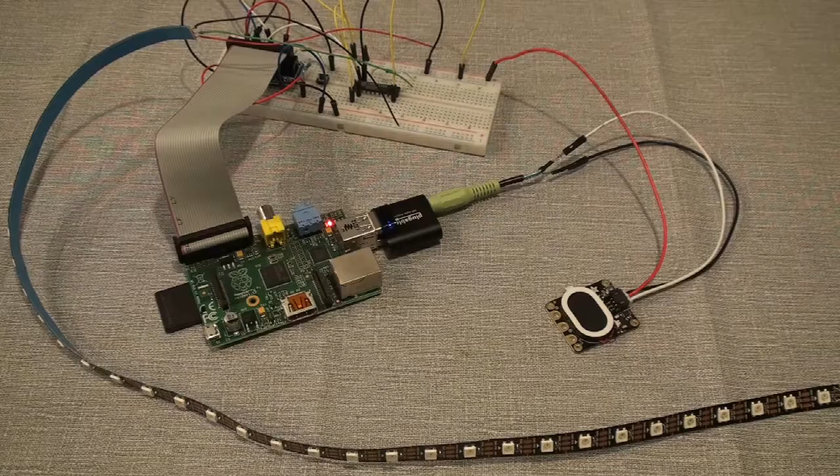Even better, it was such a simple, quick solution that I still had plenty of time to clean up those counters while it printed, which was really good because my wife was not nearly as impressed with my hook problem-solving skills as I dreamed she would be. Let's get into it and see how we do it.

This is another project that's going to have a very short parts list. We'll of course need a 3D printer. I'll be using my Ender 3 V2 over here. And to go in the printer, we'll need a filament of your choice. I'm going to be using Overture's white PLA. Where I'm going to use the hook, there's not going to be any environmental factors to consider. It's not subject to high heat. The brush weighs next to nothing, so it's not going to have a lot of stress put on it.

You might want to use a different filament though, depending on your application and the weights that you're going to put on your hook. You're also going to need some kind of adhesive substance to attach your finished hook to your finished product. I'm just going to use some super glue as I want this particular application to be permanent. But choose the substance that works best for your project.

We're also going to need some kind of measuring device. I'm going to use a micrometer to get the dimensions we'll need for the hook. On the software side, you'll need a 3D design program. I'll be using FreeCAD. And of course, don't forget your notebook to help with the planning process.

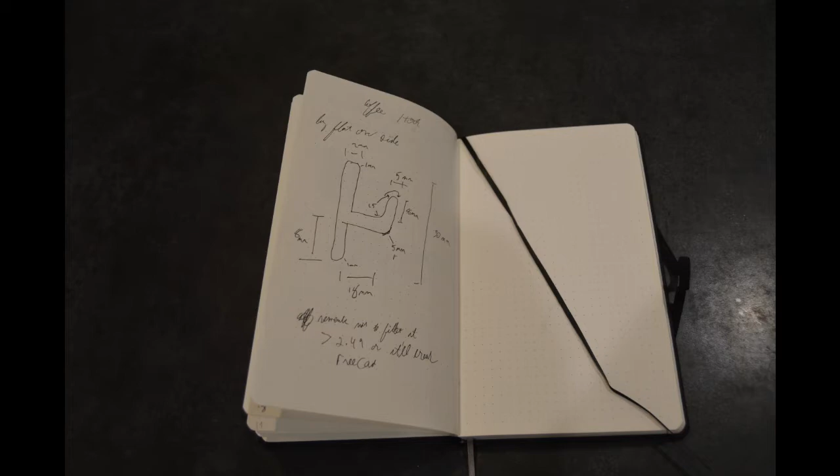Now, before we switch over to FreeCAD, we need to think about how we're going to be printing this hook. Now, I'm using an FDM printer. How I orient my hook on the printer bed matters a lot. Look, this hook is really thin, 5 millimeters in diameter. If you have to use supports to print it, it's probably going to break the hook while you're trying to remove those supports.

I don't want to orient the hook, obviously, with the hook side down on the printer bed. It wouldn't make sense. It could be tempting to orient the hook with the hook side up and the back down. After all, that would be pretty stable on the bed, and it would maximize that nice big rectangle that's touching the build plate. But as you can see, that would leave this hook part here unsupported, which is probably going to lead to a bad print. Instead, I think it would be easiest actually if we orient our hook on its side.

Yeah, that means the hook itself will be touching the build plate, and that's a small area as opposed to the back. But most printers will likely be able to print a hook on its side like this without having to use supports. So when we design it in FreeCAD, we're going to want to design it on its side. With some of that planning out of the way, let's flip over to FreeCAD and knock this out.

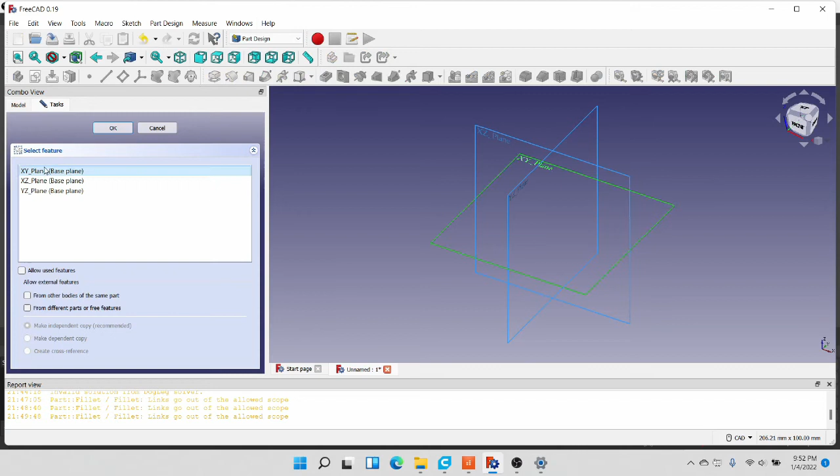So once we go into FreeCAD, we can go ahead and start creating our hook. So go to the Part Design Workbench, we'll create a body, and we'll create a sketch on the XY plane. We're going to choose the multi-line tool here, or a polyline, and I always like to start at the origin on this. So make sure we start at the origin.

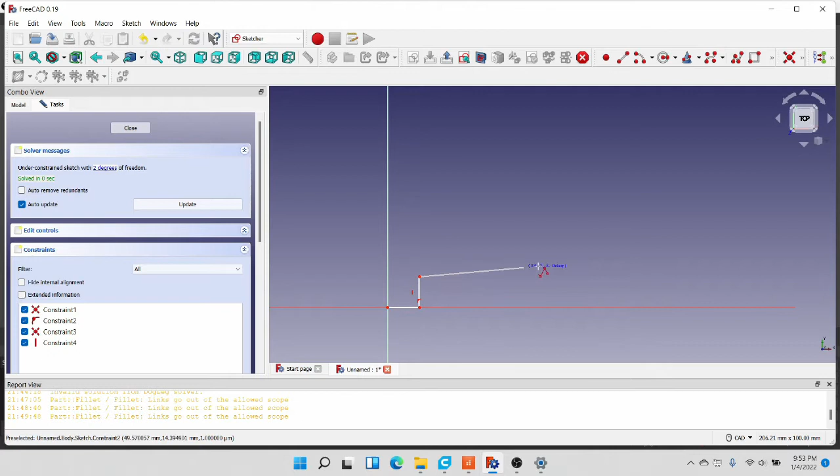We're going to come across a little ways. We have to just rough out the shape. We don't need to be exact with anything we do at this point. We'll add some constraints in later that will make it a lot more clear. And all we're doing at the moment is actually drawing straight lines. We will add in the curves and things like that using other tools in just a moment. And then we'll come over and grab this origin, and then we'll close our shape.

Next, we're going to want to add in our fillets. So we'll come up to grab the fillet tool here, and we'll round off those corners where we want them. So we're going to want one. Try this again here. Here. We'll do another one here. We're going to want to round off the top of this bottom, and this bottom over here.

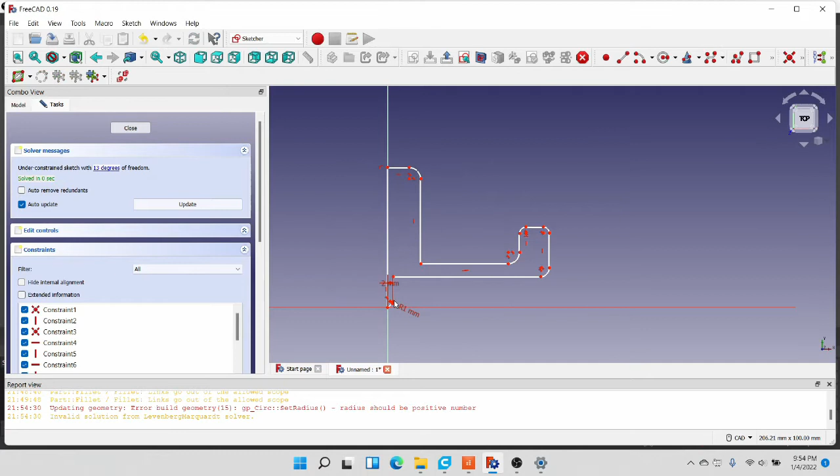Then we can start adding in some of our constraints. So we know that we want our hook to be about 2 millimeters wide, so we'll add in a horizontal constraint here. And we're going to do Shift R and add a radius constraint of 1 millimeter on that corner. Lastly, we need to make sure that this is constrained horizontally along that x-axis. And then we'll come up and do the exact same thing on the top.

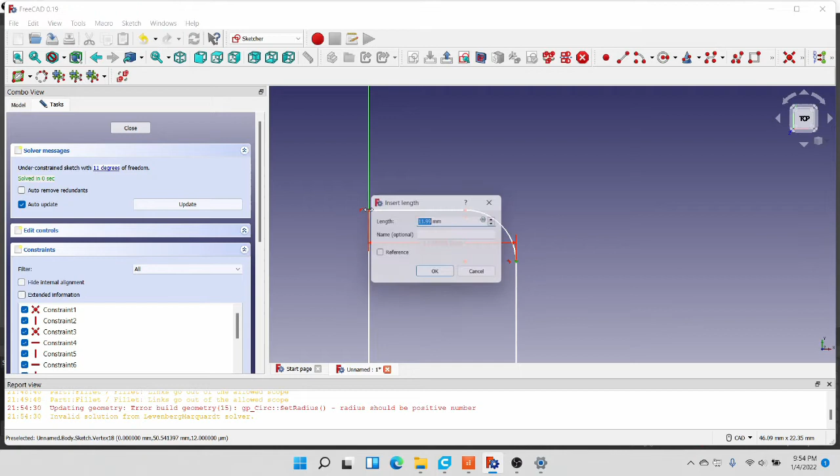So we'll choose that far part over there, do Shift H to add a horizontal length constraint. I'm sorry, we need to come over here and do this one first. We'll add a 1 millimeter constraint on that radius, and then we can do our horizontal constraint here by doing Shift H. Next, we know that we want this far line out here to be a total of 30 millimeters tall. So we'll do Shift V and add a vertical constraint of 30 millimeters to it.

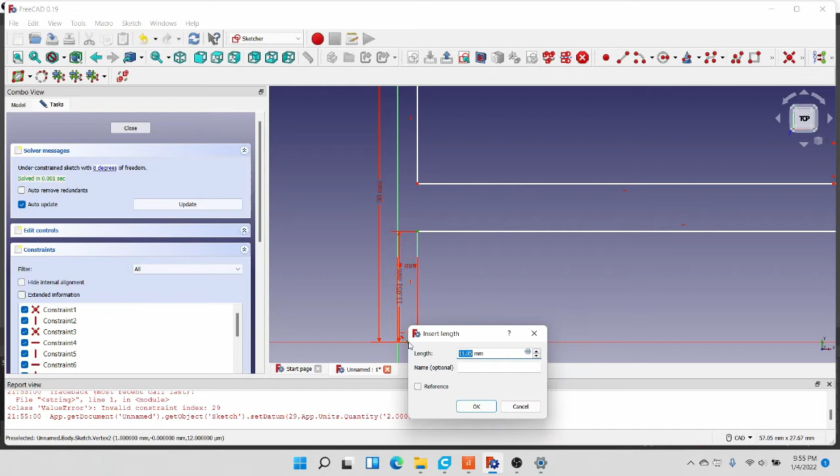Coming down here to the bottom, we want this distance to be, let's go 8 millimeters. That'll give us a little bit of a base. So we'll do Control, grab those two, do Shift V, and make that a total of 8 millimeters there. Move that out of the way a little bit. And then we'll go over and add some constraints on some of these corners.

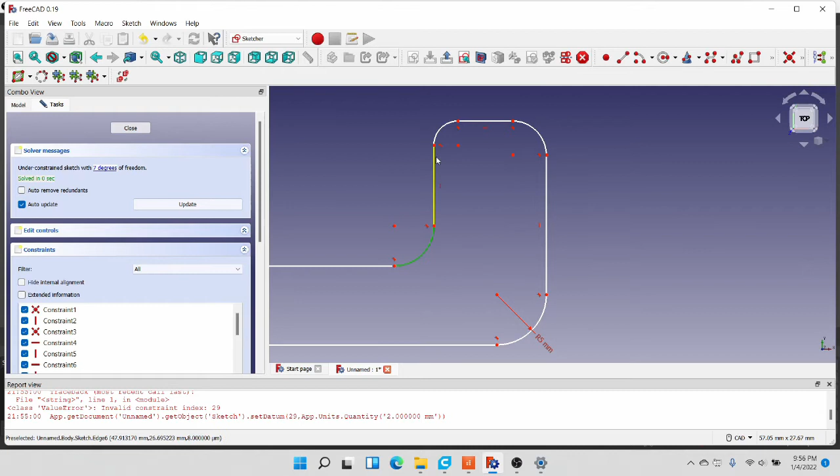So this one on the outside, we need to have it be 5 millimeters. These other three, if you hold down Control, we can select them all at the same time. We're going to have them be 1.5 millimeters. So if you do Shift R, it will give you the option of making all of them have the same radius. We'll go ahead and choose yes, and we'll make that 1.5 millimeters.

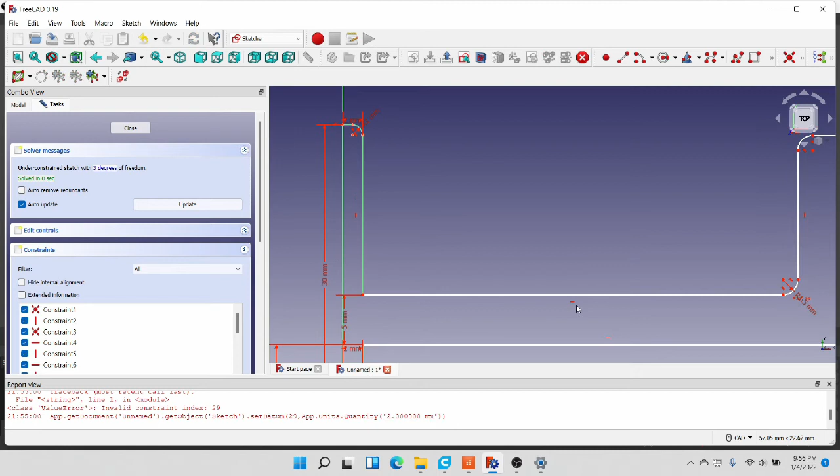Now we can add in some distances here. So we know that we want this distance from there to there to have a vertical of 5 millimeters. We know that we wanted the distance for our hook to be 18 millimeters. So we'll do Shift H to add a horizontal constraint on that line.

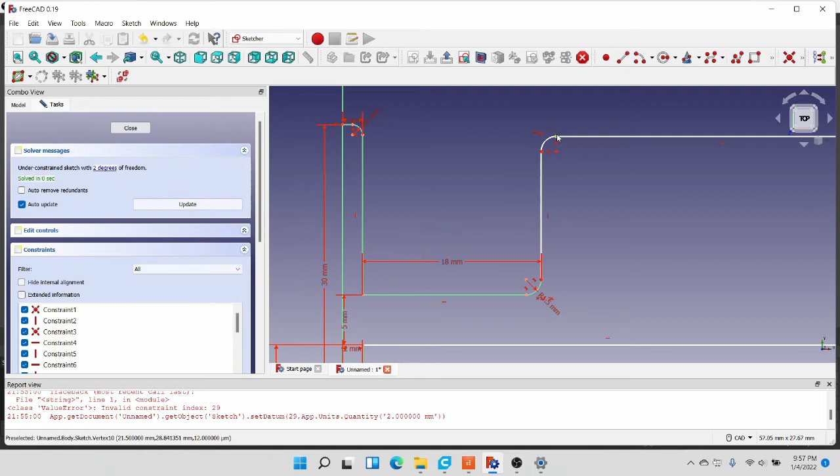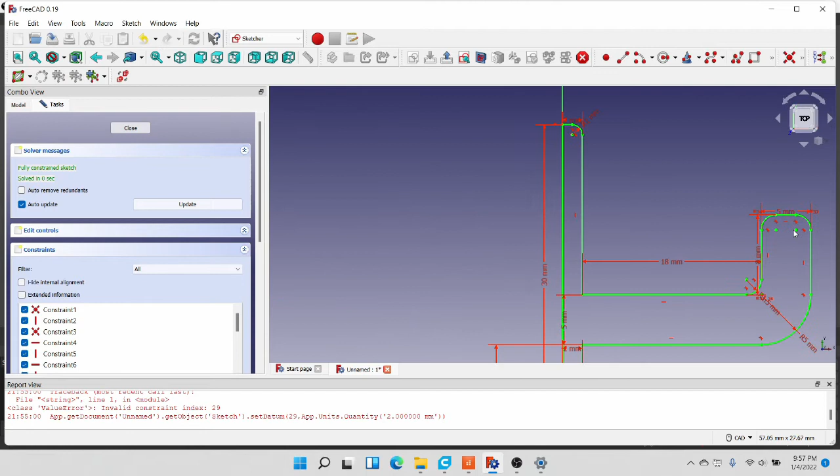And we wanted our hook to be a total of 8 millimeters tall. So if we grab that top one, hold down Control, grab this one here, unselect everything. There we go. We'll grab those two, do Shift V, and make that 8 millimeters tall. And then we want this distance across from here to also be 5 millimeters. And with that, our entire sketch is constrained, which means we can go ahead and pad it out.

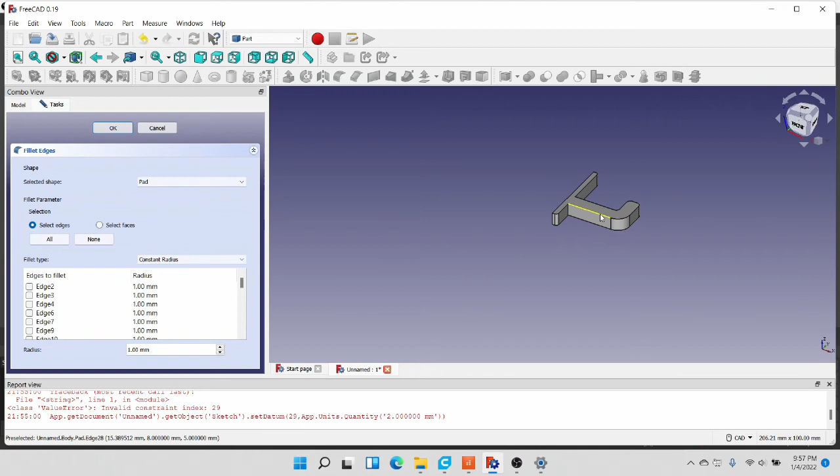So we'll close this and we'll choose pad, and we want it to be 5 millimeters tall. And then the last thing we need to do is round off all these edges here. So to do that, we'll come over to the part workbench, grab one of those edges, and come up here to this fillet tool, and we need to click on all of those edges that we need.

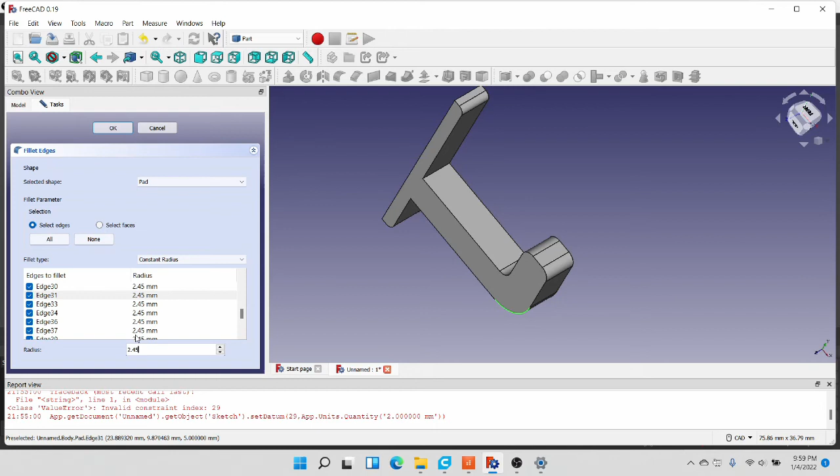Once we've selected all of our edges, we can come down here. We know that we want it to be mostly round, but if we do exactly half and put in 2.5, then FreeCAD is going to just have problems and it won't work. So when you do something like this, you have to go a little bit under. So we'll go 2.45, and then we'll hit OK. And with that, we have our hook all rounded off all over the place.

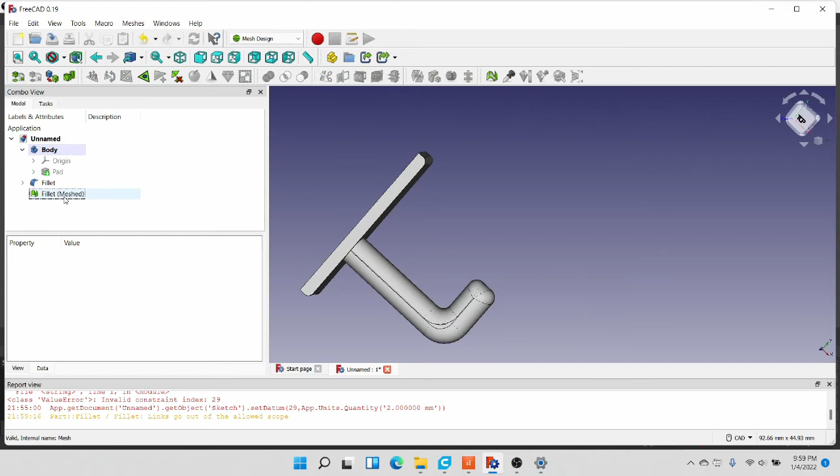At this point, we can come back over here, choose our fillet, come up to the mesh design workbench, go meshes and then create mesh from shape. We'll go ahead and choose OK here, and then we're ready to export our mesh. And we'll just call it coffee hook. And now we're ready to go over to Cura or your slicer of choice and get it printed out.

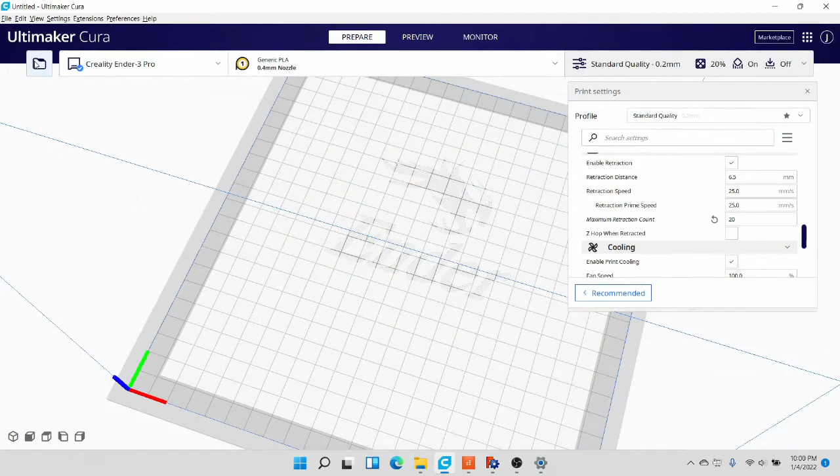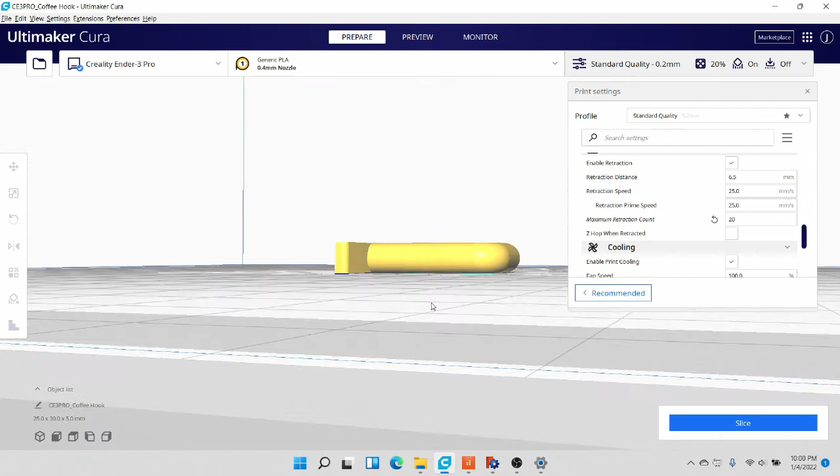Once you're in Cura, we'll go ahead and open up and put our coffee hook on the build plate. One of the things we talked about during the planning stage was the importance of thinking through how to actually design your thing so it will build properly. And as you can see, the very bottom of this is actually touching the build plate. This means that we're going to be able to have decent enough bed adhesion to get this to print, yet still be rounded and not have to deal with supports. With something this thin at 5 millimeters, any supports you use are probably going to end up breaking something, or it's going to just look horrible.

So you're not going to need to print this with supports as long as your overhang tests show that you can print something that's generally round like this. My printer's not the greatest. I'm not set up the greatest, and yet I've had no problems printing this. So we're ready to go ahead and slice and hit the print button.

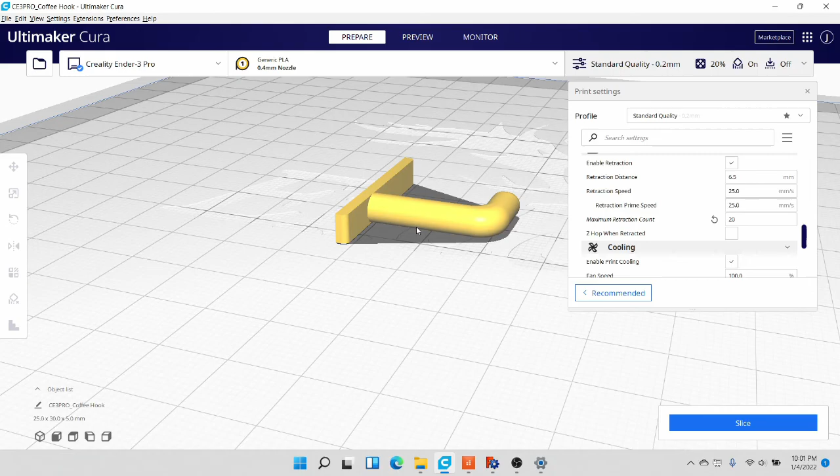Coffee, coffee, coffee, coffee. Grinding those coffee beans.

And there we have it. A simple hook glued to our coffee grinder. You know, this project for me was only marginally about designing and printing a hook for a brush. The whole bit about cleaning and coming across that loose brush did actually happen a couple months back. For me, it was one of those lightning bolt moments when it finally dawned on me that, hey, I got a 3D printer and I can solve my own problems.

My original instinct had been to just go out, buy a hook. Those things are dirt cheap, but I didn't think I'd really be able to find one small enough for my coffee brush. And then for whatever reason, that was the moment that it hit me that I could just make my own one of them. And so I did. Now what's great about this hook project is that it's completely customizable. Now that you have the basic concept down and oriented it right on the build plate, you can build bigger hooks or wider hooks or hooks with camel humps in it. It really opens up a number of possibilities in solving your hook related problems.

The project also helped me think outside the hook. I've since printed solutions for other broken problems around the house, and in one case I probably saved myself about $100 over buying a replacement part. But that's for another video.